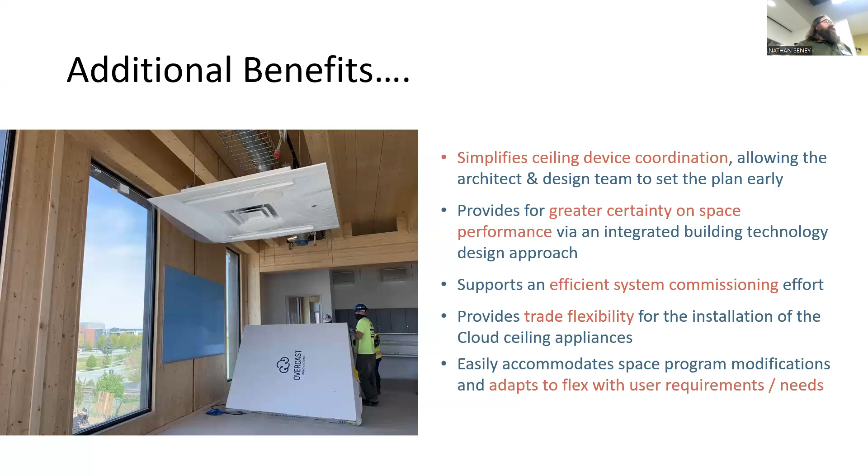So, and again, it offers just a lot of adaptability, and I think about that with building enclosures. Usually, like this building, this is an entry project, so I can't say anything bad about it. It's beautiful, but I can imagine our clouds in here, and usually you don't get a choice if there's a cold spot or something like that and you want to move things around. And with traditional systems, with already...

So I'm going to look at this slide. So our clouds are basically where people congregate in buildings. We're in probably 60% of the building overall. There's our cloud on the right, and then there's spline, which is a multi-raceway.

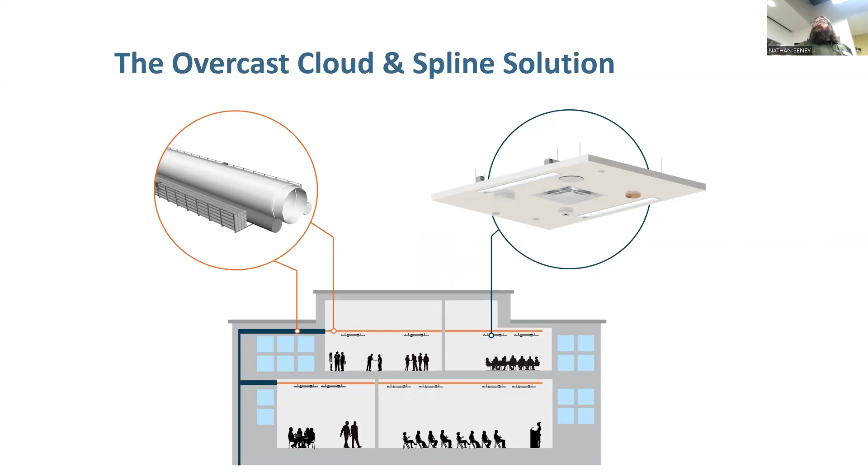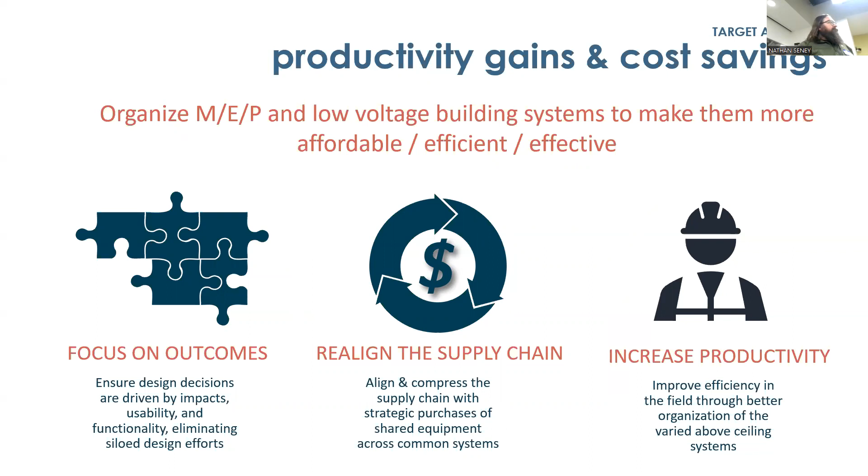Next one. Kind of what I talked about earlier, we push all the design decision making very forward in the design process. So we won't bring in the Siemens guys at the very end, let them figure out where everything's going to be. We get everything designed in through our tech panel that we'll show here in a second. Supply chain, I talked about that.

Perfect. There we go. So on the right hand side, this is the top side of our panels. And you can see the lighting, basically one point of contact for all of our systems. And then on the left hand side, you can see basically the three elements, all the tech lane in the middle there, the acoustic panels. If it's a CLT project, then we have the lighting on the outer edges.

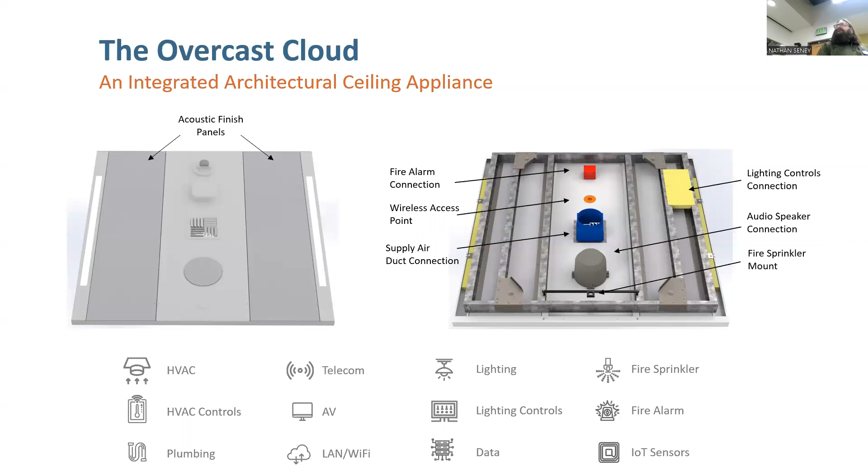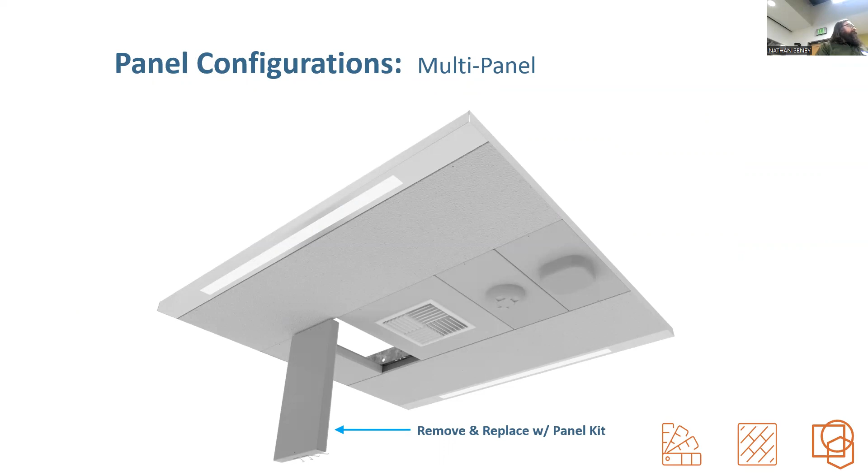I'll just skip this one. This just kind of shows how we get involved with owners and this system very quickly. Yeah, so there's the three different systems. If you've got an OEM relationship with someone and you want to incorporate that, it's going to take longer, it's going to be more expensive, but we can incorporate it. Otherwise, we don't want to end up with what happened with Terra, and we're just minimizing all the other systems.

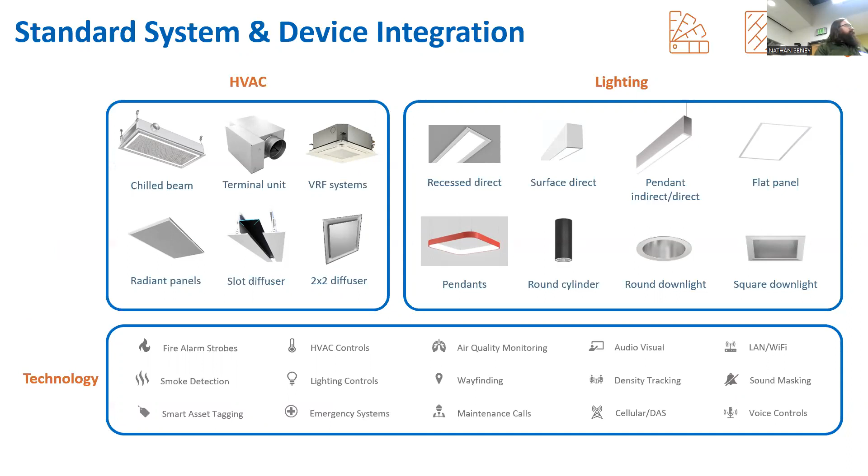Okay. Some of these are auto jumping. I'm not clicking ahead of it.

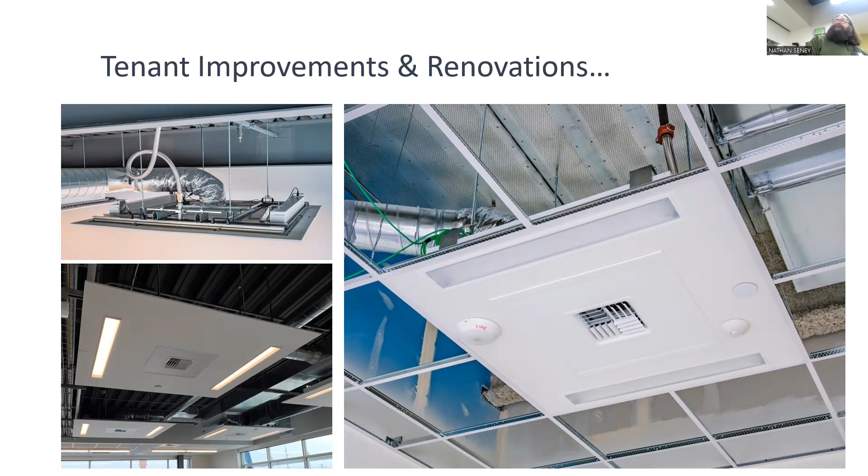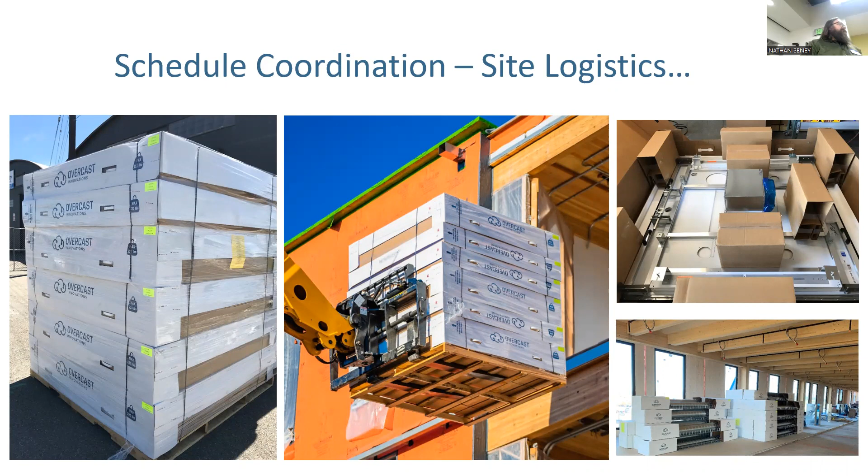And this is how, so we go into the outer building enclosure. We try to design in some space so that we can get in there. And then you can see on the upper right hand side, you can see the dunnage right there. It's using uniform contact. GCs, we train in about an hour, basically how to lift these up. Next slide can show that.

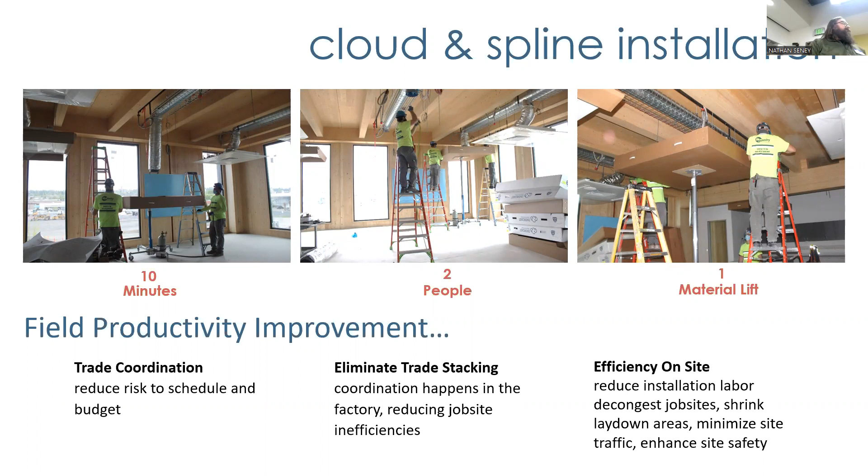And it's extremely efficient. So everything's the same. We're not changing the game or the skin here. It's just that last line, that last 5 or 10%. This gives GCs an opportunity to basically own a new technology that they've never played with before to finish that last one. I think this was outspoken also. And this is probably the last slide.

Maybe with this system, it's going to give some more flexibility in terms of some of the kind of gotchas with building enclosures where basically the sensors are just right here, which really doesn't monitor what's going on over here. So we're incorporating, this is basically a smart building platform. That's the message I would say. So it just offers more flexibility and smarter opportunities for us perhaps to work with the building enclosure side. I'll end there.

Thank you for that introduction. Cool, Brian, thank you so much. Yes, sir. Yeah, a set question and then a question.

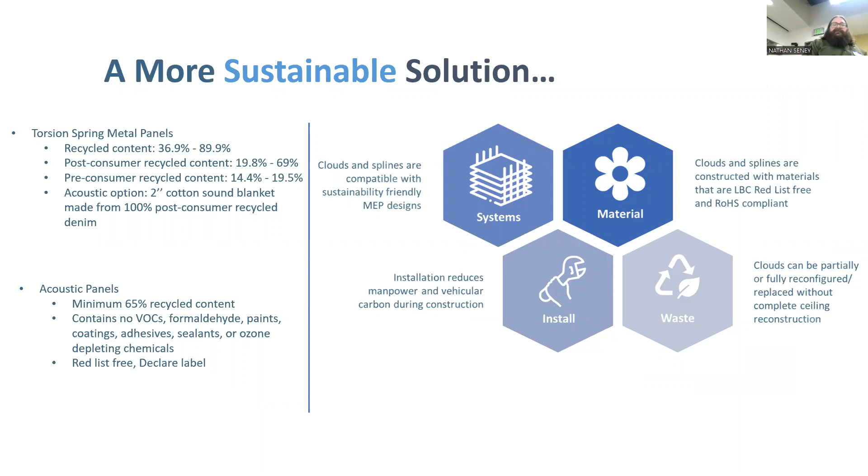So today we have Brad Carmichael from 4EA. He's principal at 4EA, originally from Vancouver. Oh man, I want to advance. He's been working on building enclosures in North America for 15 years. And he's bringing us his presentation on mass timber moisture monitoring in the Northwest.

Thank you very much. Hopefully this, I see it's run away. Oh, there we go. Okay. All right. Thanks for everybody being here. This is a topic that's sort of near and dear to my heart. It's part of the end of a big collaborative effort from a project. Wow, is it a timed thing? Because I speak very slowly.

Okay. So you'll see that this is part of a joint paper that Jeff from my office helped write, as well as Emily Dawson from Kaiser and Path. And it's a case study based off of a project, the Canyons down in Portland, with a lot of input from a lot of parties. And there's two more important contributors as well. If you've ever seen me talk, I always include a picture of my kids.

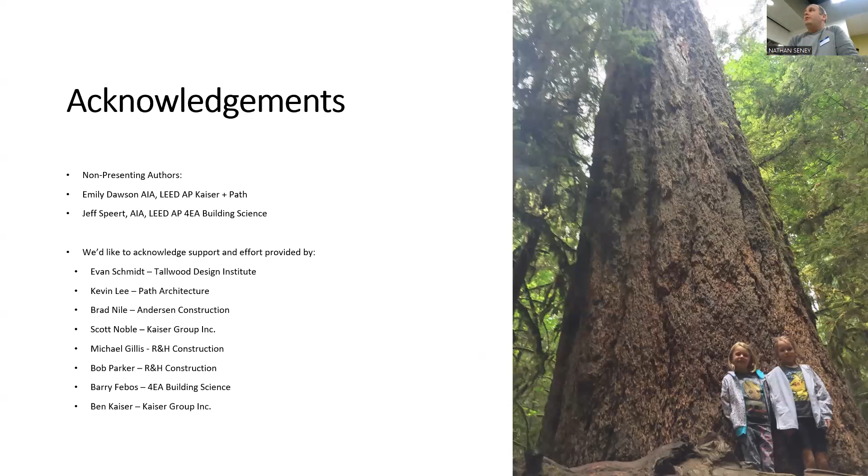And then this is some old growth Douglas fir about an hour from where I grew up on Vancouver Island in Cathedral Grove. The emphasis is on the need for sustainable forestry management, but also the benefits that building and constructing with wood can bring to us.

So what I'm going to do is give a little bit of a background on mass timber and moisture management. It's an ongoing topic. I'm sure that everyone might be familiar with it. I'm going to look at some of the prior studies by others. Give a brief overview of the Canyons project and how we collected our field data. Then get into the wonky elements of hygrothermal modeling and the fun that comes with that. Some discussion of results and some conclusions.

All right, how we doing? I think that should do it. If we can just resume.

Hopefully that's it. All right. All right, let's see. Okay.

So the big question is why mass timber? To ask it again, why mass timber? Well, basically, we all see the stats that buildings contribute to about 40% of greenhouse gas emissions. Of those 40%, 10% is attributable to the construction of buildings, and of the 10%, roughly 60% is structure, and most of that is concrete and steel.

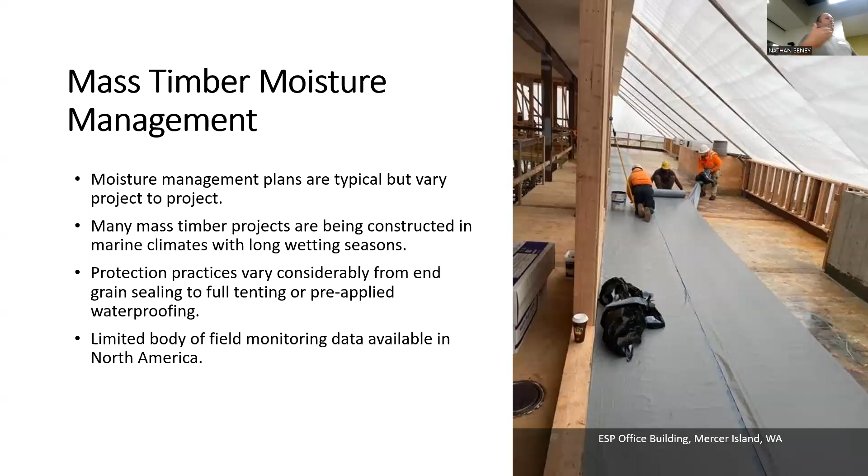There's not really a good established set of best practices. There are guides out there. There's also a limited body of field monitoring data out there to inform and give us evidence-based best practices. And so that's kind of what we were looking at here. So there is some field data collection in North America on CLT. So there's field data from a summer test wall out in Waterloo. Christy McClung did a number of experiments where they set up test walls in Ontario, set up data loggers and monitored the performance of the mass timber.

Then one of the first ones in the Northwest was the UBC Tallwood project, and they put data loggers to monitor the CLT there. They also noticed that moisture content spikes and rapid drying of CLT were occurring after rain events. And then there was an attempt for one of these buildings in Portland to monitor the CLT installation using data loggers that were sort of routed out and placed into the CLT. And this was at the Carbon 12 project in Portland.

And they monitored the CLT installation, but one of the issues that they had was by placing permanent data loggers on the CLT panels and putting them into service, water gets into the holes. It gets into the little spots where the probes are mounted, and it kind of starts to poison the data a little bit. So they ended up getting some pretty bad data results, and they suggested that maybe there's a different way to measure and monitor the moisture on CLT as it's going in. So there's also been some work on the other side of the hygrothermal properties of CLT.

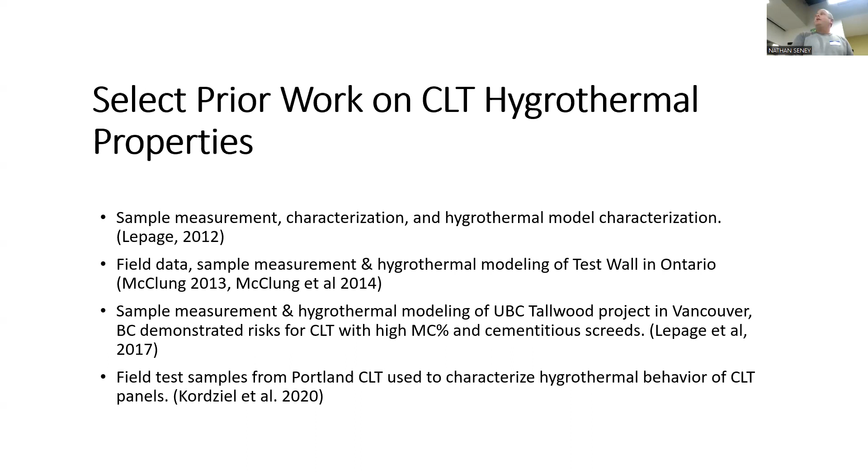Robert Lepage at RDH has done a ton of work doing sample measurement, characterization, and model characterization of CLT, as well as the Christy McClung work out in Waterloo. There's been some sample measurements of the UBC Tallwood projects, but then also this CLT project at Carbon 12 took some field samples of the CLT that they were going to be monitoring, and they built a hygrothermal characterization of the CLT. So basically the inputs that you would use to build a WUFI model using the CLT from this Carbon 12 project. That was just recent, in 2020.

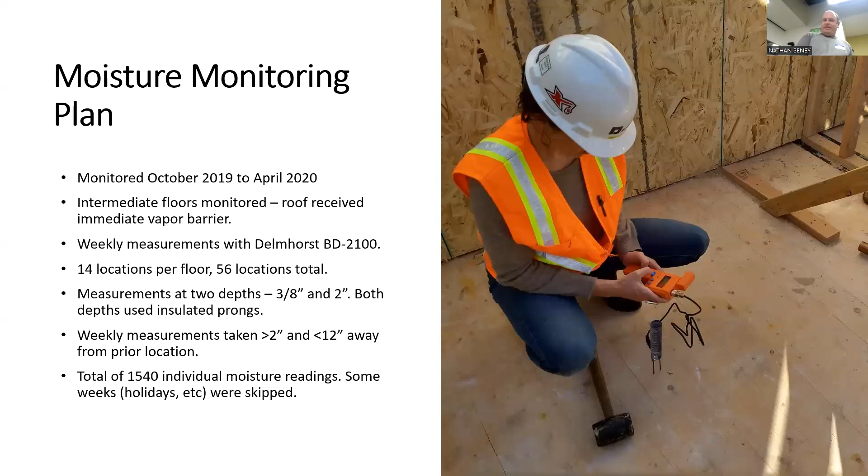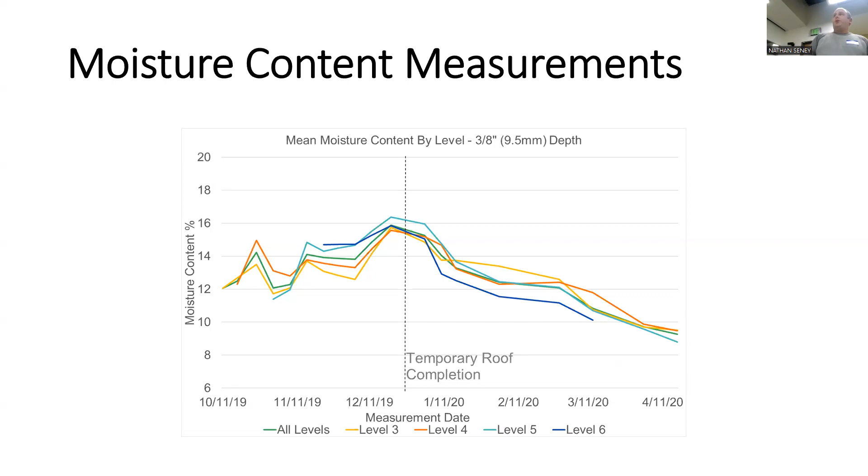So one of the things we found is you look at the start of each one of these lines. With the exception of level 6, which is the dark blue line, all of the other panels started at around, on average, 12% moisture content. So that means that generally through transportation, panels stayed pretty dry. 33 out of our 34 initial readings on the first 4 floors were all below 15% moisture content. One reading was at 21%, and on average, we were around 12% to start.

6th floor, I don't know what happened there. Maybe it's the last floor to go up, so it might have been neglected. The wood might have been stored in some odd way. It had 4 of 14 readings above 15%, but still an average initial moisture content of 14.7%, not too scary. But as you can see, the moisture content does go up from there. Is that the roof, or is that the 6th floor? Not the roof, because the roof got roofed in right away, we didn't even have time to do moisture content readings. So the 6th floor was just the last floor right before the roof.

Yeah. It's almost like maybe you guys should have just waited a few more weeks and let us get some data before closing in the roof. But yeah, come on, guys.

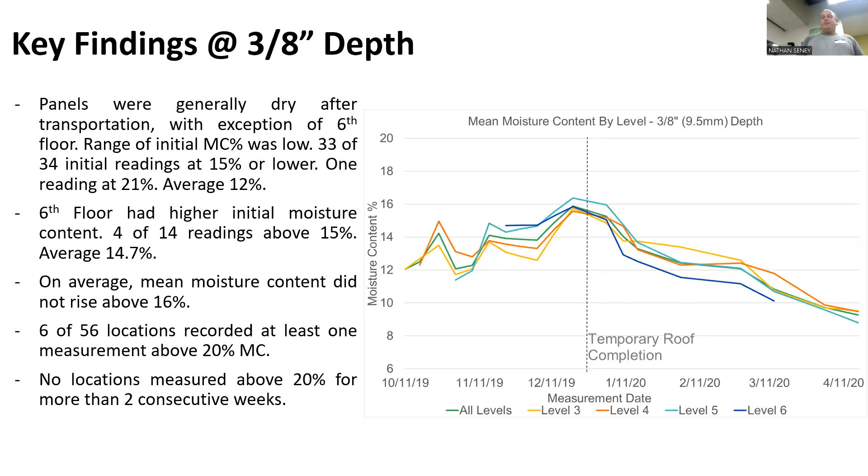You mentioned that you were taking these measurements. If readings were high, were they taking actions to address it, or just collecting the data? Good question. Jeff? I think it was mostly data collection, but there was an expectation that if the moisture content was higher, we would all know that we might have an issue. If it's the 3rd week and we can't get this wood dry, we would have had to take different steps, introduce early drying, improve the drying of the building, and start protecting areas. But the idea was, since the wood's exposed, as long as we were keeping an eye on it within a reasonable range, we all felt okay going along. So that was the intent there.

Okay. I actually learned this sort of recently. Moisture content readings got as high as 27.8, but the error is so high that I shouldn't even say it. So with a moisture meter, once you get it that high, it is totally inaccurate and it's just wet. But that was the highest measured moisture content reading that we got throughout. It does show, though, that some parts, if you let it go, can get wet, but the error in a moisture reader is just so large at that point.

But all locations at all floors, by the end of the dry-in period, were below 14%, within plus or minus 1%. Everything sort of hit that target by the time we needed our construction to keep going. We were typically within the 9 to 12% range. It did show that the dry-in was effective at getting the moisture out of the 3/8 inch depth.

Why did the level 6 stop? Yes, good question. So as far as I'm aware, that's when they put the floor on. So they'll load the building. They're going to pour the gypcrete floor on the top floor to sort of settle everything down. So gypcrete for level 6 went on March 11th, and so the readings just stopped for that floor. And by that time, everything else was down below.

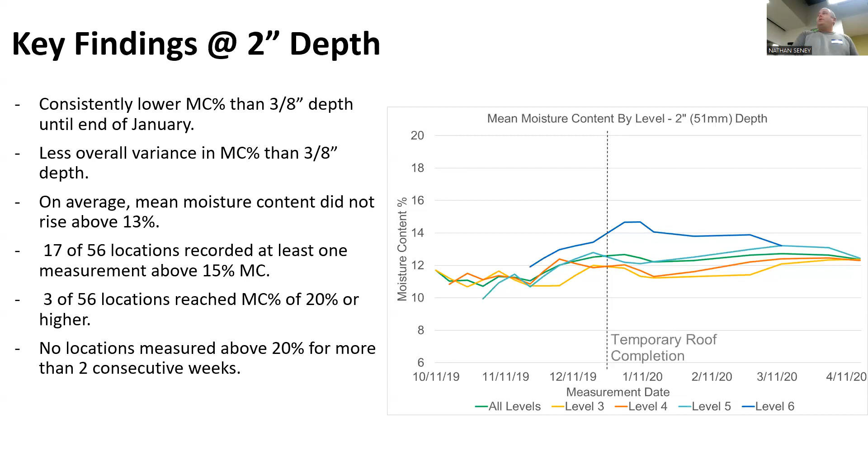Similar to the top ply, none of our locations had more than 20% for more than 2 consecutive weeks. So there's a slightly elevated moisture content after January. Everything was less than 15% consistently at the end of the dry-in period. Initial drop at the start of dry-in, gradual rise and plateau.

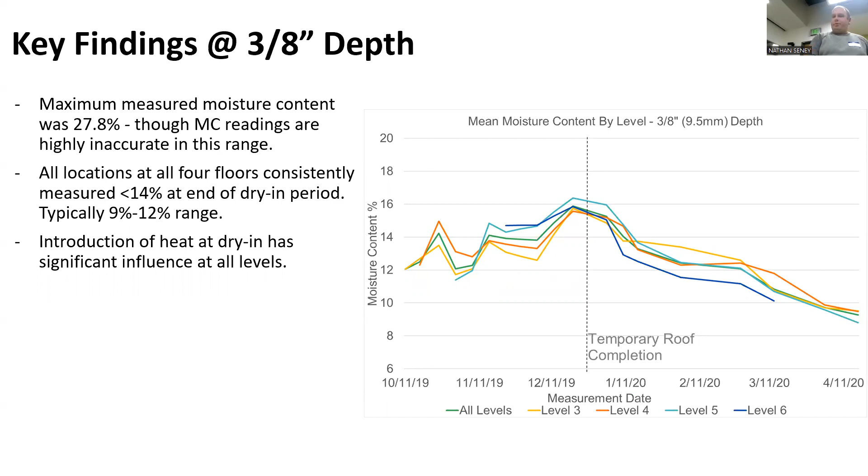And then the other weird thing is you almost have to look at them next to each other, but there's about a 2-week shift between the peaks and the valleys of where our moisture content went. So you can see that highest peak, the biggest amplitude of our wave, is on the left-hand side of the start of December. But the big peaks started to move and shift a little bit to the right-hand side towards the start of January before they have that drop off with the drying.

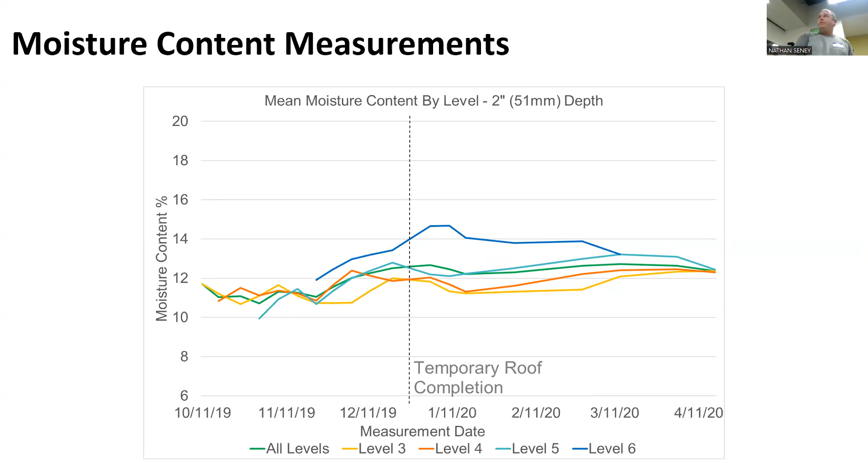And it was somewhat consistent, and it's hard to show in just the overall averages, but there was about a 2-week phase shift: when you have rain events, the 3/8 inch readings started to go up, and about 2 weeks later is when the middle of the panel started to go up. And that's just the slow process of wood redistributing moisture within itself. This is a question in the Q&A.

Sure. Oh, right on. Oh, I've got that somewhere.

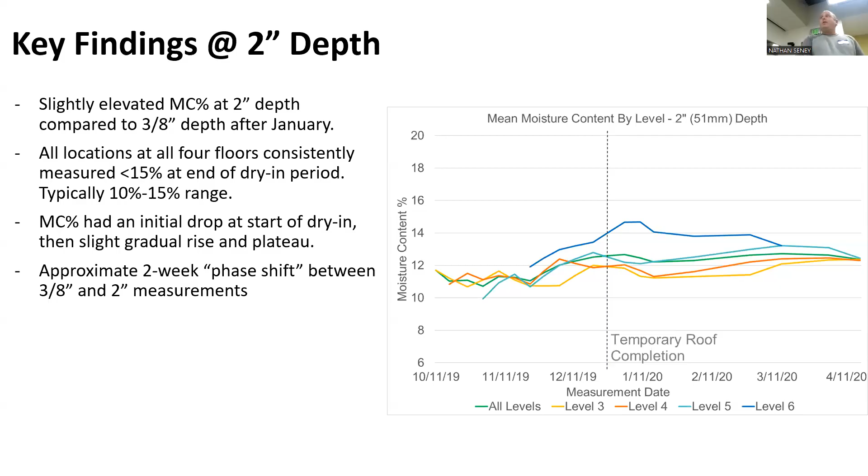Yeah, the question is, how many days of rain occurred during construction? There were a lot of days of rain. So there was a rain gauge, and we do have a weather file. Rain definitely occurred. I don't have the number available, but I can certainly follow up with that separately. I just have to dig into the weather file. But it definitely saw rain, and you'll even see I've got some photos. The panels got wet. It wasn't by any means a really dry winter. It wasn't the worst, but it was.

Oh, I think it reformatted my thing. Okay, that's all right. I think there we go. I think I had it on a wider slide.

So then what we did is we had all this data, and this building is right next to one from a paper where a group had been taking samples of the CLT and establishing their hygrothermal characteristics. And we had all of the data to match with that, because we were using the same supplier, same location, right next door, and similar project team.

We also, and I'll talk about it a little bit more later, had to make some adjustments to the models based off of research that was done on the UBC tall wood, which was starting to find, hey, the wood seems to dry out a little faster in real life than in the models. And that's what we're going to talk about a little bit. So here's the model setup from our characteristics, just to give a brief idea of how the inputs work.

So just as a bit of a background, WUFI is a transient hygrothermal model. It's one-dimensional. So you'll set up an assembly in a one-dimensional line through the assembly, assign material properties to it, assign exposure to it, and assign time basically to it, like weather exposure to it. And what it'll do is it'll give you the simulated moisture contents and relative humidities and temperature fluctuations through the assembly over the course of a period of time.

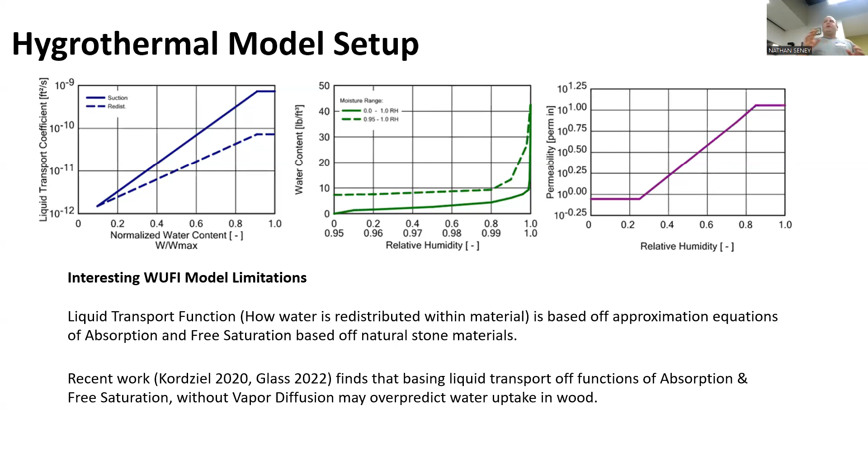We'll talk a little bit about that in a bit, but what's basically happening is these hygrothermal models, even when calibrated properly, even when using lab measurements of the same sort of things, the simulations are showing water getting absorbed faster and drying out more slowly than perhaps real world measurements would show. So those are the functions on the top line for the interior ply.

So how your liquid transport coefficient changes with your water content, but also how the RH, we'll talk about that, goes up with respect to the water content. And then how the permeability changes with relative humidity. One of the cool things about wood, it's a smart vapor retarder in a lot of ways, right? So when it's humid, it becomes vapor open. When it's not humid, it becomes a lot more vapor closed.

The panel itself, you can kind of see there, it's like the most boring WUFI model in the world. So you'll see we built a 5-ply panel. The darker brown is the outer plies of CLT. The lighter brown are the inner plies of CLT. We sliced the surfaces to give a 1/4 inch wide stripe at the 3/8 inch depth where we put one monitor. And then in the inner ply, we did another 1/4 inch slice at the 2 inch depth so that we were able to basically isolate.

If you are ever doing hygrothermal modeling, these slices are really important because if you're trying to find moisture content at a specific location, you need to slice the material. Otherwise, it'll give you just average values averaged out over the whole depth of whatever material you're using. And it's not that useful because you might have high moisture content towards the very edge of a panel, even though it's showing okay on the average. So you can sort of see those thin slices represent us trying to isolate where the measurements took place. And obviously it's shown vertically, but in the model, it's modeled as facing skyward.

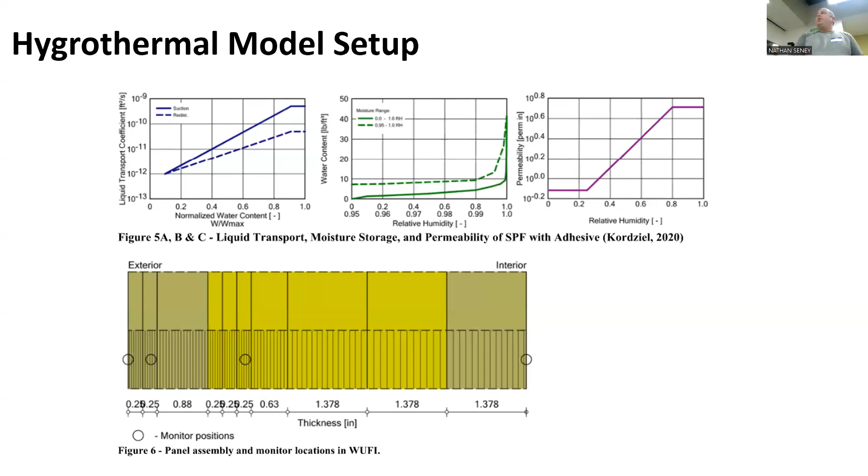The biggest thing with WUFI when modeling something like this is your rain load assumptions. And we run into this not just with sky facing CLT that's covered by the floor above, but also like how much water is actually going to get on a wall. There's baseline assumptions that if you don't know your project you can use, but once you start introducing things on a wall like canopies and roof overhangs and any areas that'll somewhat shelter, all of a sudden the fraction of rain that sticks to your wall starts to go down. And depending on the material you're using, right? So with a metal panel, less water's going to stick compared to a stucco wall.

One of the things we found is that when you're doing a sky facing assembly, when you do a roof, you turn the adhering fraction of rain to 100%, all of the rain lands on the panel, right? If it's totally sheltered, like that job where we had the tent over top and you want to monitor just the ambient moisture that's going to be going through there, you put down 0 rain, and then it's just ambient humidity that's going to impact your model. But what about a platform framed building where the floor up above is partially covered and you've got open windows and different levels of rain that are going to be hitting the panels?

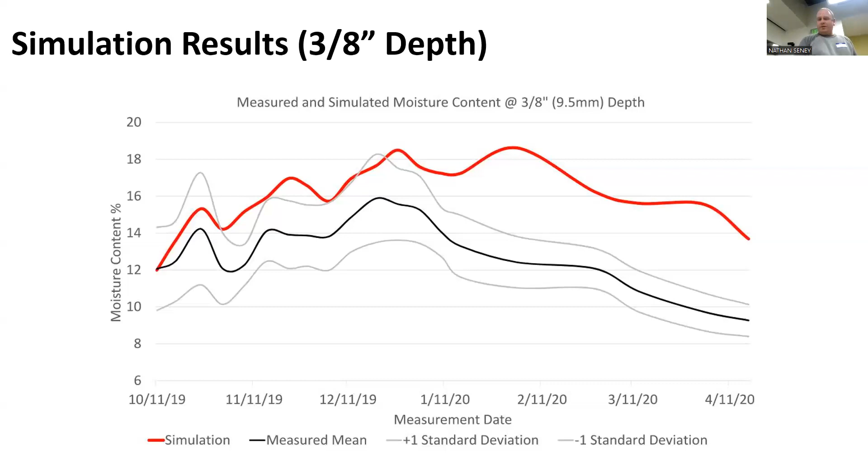Why is it not? Doesn't seem to be. I might have clicked out, perhaps. Here we go. There we go. Okay.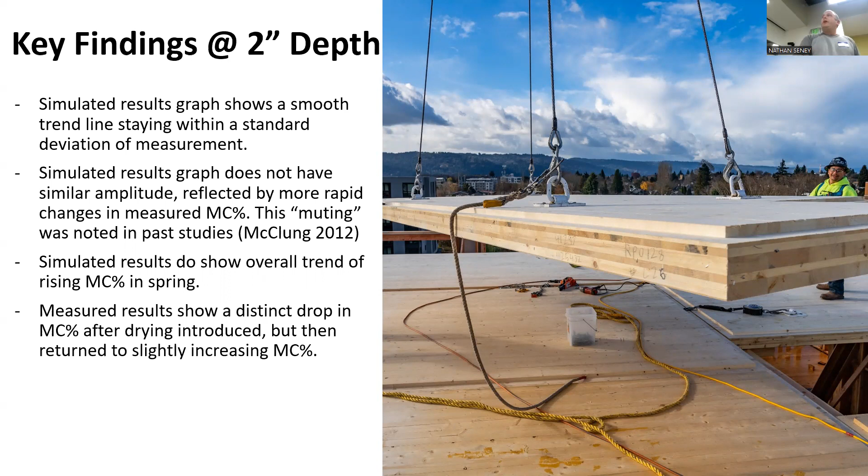The muting was actually shown in past studies. It seems here that the simulation kind of mutes the level of liquid transport within the wood panel over time compared to how you would actually measure it. So there are similar trends in research, and it shows that distinct drop in moisture content after drying compared to the models. You can see the difference between the black and the red once heating is introduced at the start of January.

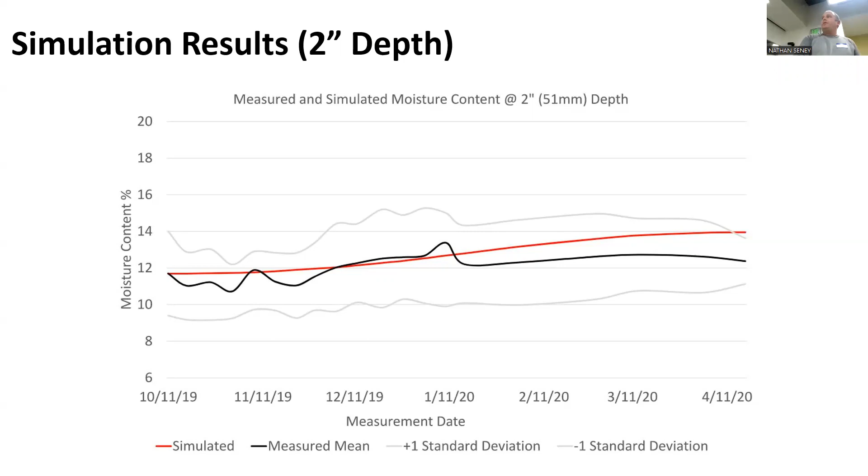So what's going on here? What is really cool? It's up to about 99% humidity. And even after that, most of the water in wood is actually bound in the cell walls. It's not really liquid water. It's called bound water. And that's why wood shrinks and swells as it gets wet and it dries. It's not actual liquid water that's sitting so much inside the wood.

But once you hit about 99.9% relative humidity, the over-hygroscopic range, that's when the moisture content starts to sort of shoot up. Okay. Natural stones are what WUFI is based off of. Those don't have these volumetric changes or bound water that wood has. So they're able to reach, like in a lab, saturation pretty easily and pretty quickly.

The other thing that we see with wood compared to the materials that WUFI is based off of is the wood has a cell structure. It's kind of like a closed cell structure in a lot of ways, and that traps air, and air resists the intake of water.

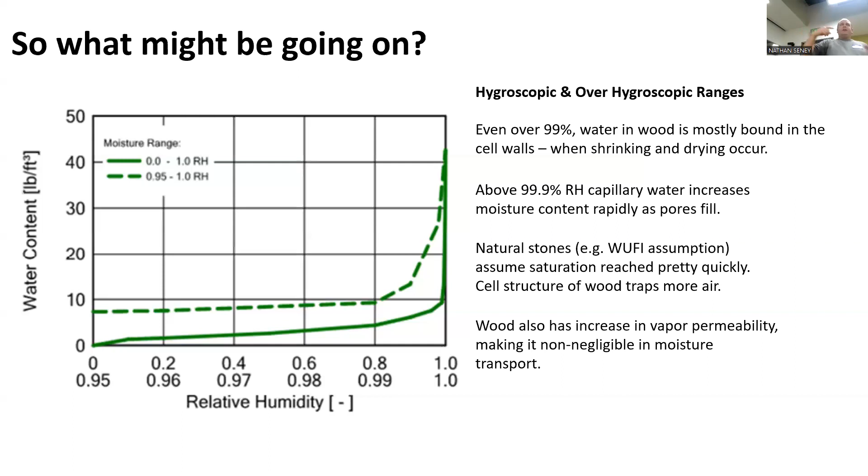So what we're seeing, or at least what some of the research is showing, is that the numbers you see in a lab from the saturation tests are actually a lot to do with the vapor permeability of wood changing over time and not being accounted for, because the models are based off of stones and masonry products that don't change in permeability as they get wet, and so they just neglect the input of vapor permeability. And so the amount of water that a model is assuming is double counting the amount of water due to the permeability of the material.

So your wood is anisotropic, straw is bundled together. The uptake in the side of a panel is quite low. It undergoes volumetric changes, and the permeability changes with increasing moisture content. Some of the published work out there is questioning whether or not vapor diffusion is getting double counted in a WUFI model. And the implications of that are that it's giving us over-conservative results if we're going to be modeling things like mass timber and how it reacts to moisture.

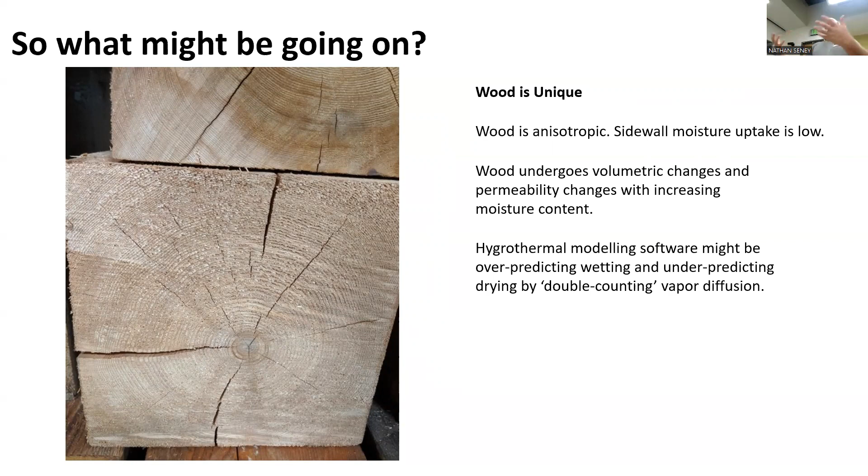Why is this important? Because we need to have really good, well-informed ways of simulating or anticipating the impacts of moisture on our wood if we're going to be building with mass timber in the Northwest, right? We can't stop construction schedules in October because we're afraid of wood getting wet. If we're going to start moving away from concrete and steel, we're going to have to live with the reality of mass timber going up in December in Seattle and how we're going to deal with that.

Over-conservative modeling may inhibit the use of mass timber. You may have contractors that get afraid to use a new material because we don't know how much rot we're going to get if it's out in the rain all winter. And it also informs resource allocation.

What we're seeing is the bang for your buck is not necessarily protecting the sidewalls of your panels, but preventing stains. Put your resources towards protecting your end grains, protecting your joints, protecting against stains, upgrading your hardware so that you don't have ungalvanized metal. Put the resources into those higher-end things, protect the wood, make sure if you've got cracking that you're keeping an eye on it, and always have a quality control program where it's very easy to have someone like a field engineer or a project architect that's there regularly taking moisture content readings and keeping an eye on it.

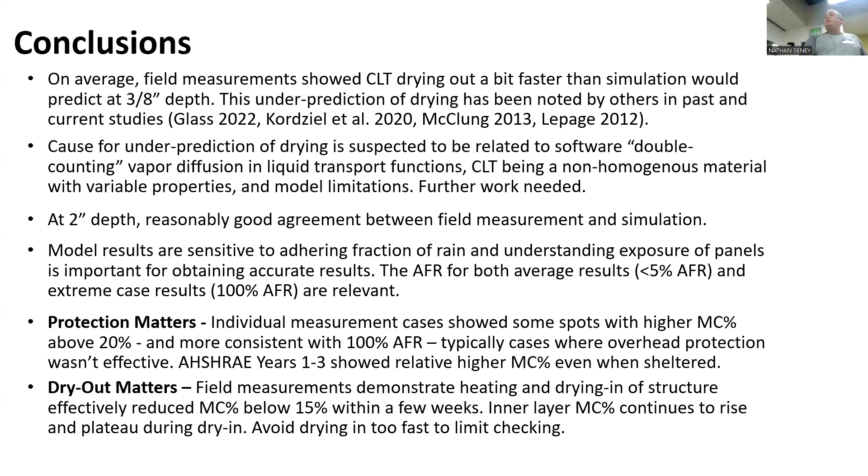And that is it. Any questions? Yes. It's been 2 or 3 years; have you had any callbacks or any issues with the panels since the building's been open? To my knowledge, no.

Yeah, and the other good thing is that building was the second building by the same developer, and so that developer who built Carbon 12, it went well. They didn't have any issues, so then they went and built the other one right next door to it. So the lack of issues was enough to give the developer confidence to do the same thing.

And we weren't on Carbon 12; we were on the Canyons, and there was a degree of confidence in the team of everything went fine on Carbon 12. Let's take care of the joints, have a plan, monitor moisture. And we were kind of, ooh, it's Portland and it's the fall. Do you see this coming up in Seattle or what?

Yeah. I think some of these projects, the Milgard Hall was Tacoma, and then the health sciences is over at UW's campus. I think, was it Founders Hall? So the University of Washington is building quite a bit with CLT. We're seeing some more CLT, the ESP offices, and it's certainly going to become more prevalent in our marketplace. Our code has just changed in Seattle to allow CLT up to 18 stories.

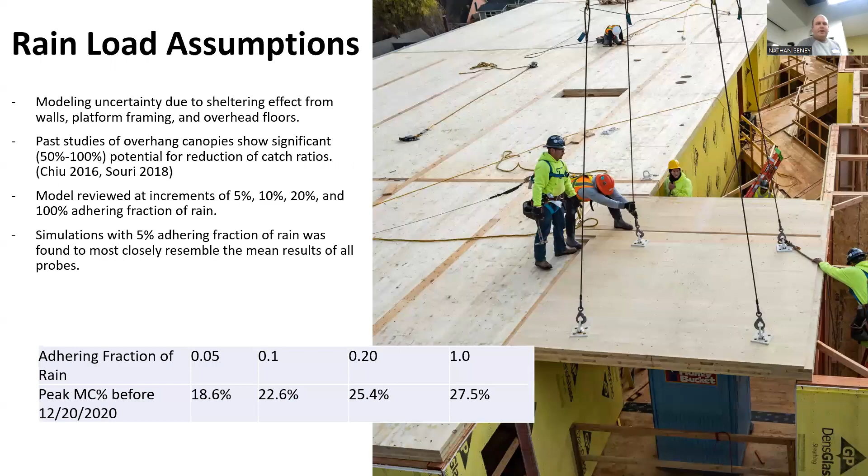What's the cost differential between concrete or steel structure versus CLT structures? Is there a rule of thumb? Yeah, that's a really good question. So I want to go back to, let's see here. The health sciences is a good example. Because there's projects where, and if I remember correctly, with Founders Hall at UW, my understanding is that CLT wasn't the most cost effective, but it was close enough that the team went with it anyways.

I'd say that it should be something to be careful about, taking the costs in a silo. Because health sciences was the one where the team planned from the beginning to beat schedule. So sometimes the biggest cost in your construction project's not the material, it's the schedule you're fighting against. And having the CLT panels, and this is actually why we didn't put a temp membrane on, what they ended up doing is just rolling a flatbed truck up to site, picking the panels in place and getting them in and keeping the building moving and getting it enclosed right away.

So they picked up on schedule by not having to wait for rebar, not having to wait for all of the concrete to cure before you can get flooring in. They pre-panelized, so we hung pre-panelized walls that were waterproofed in a plant. Those also came off the flatbed of a truck. So everything on this job on the enclosure was essentially pre-panelized. And you take that and you work that into the schedule, and it's difficult to quantify how much you save over the inevitable schedule delays you have of not getting a rebar inspection passed, you know what I mean.

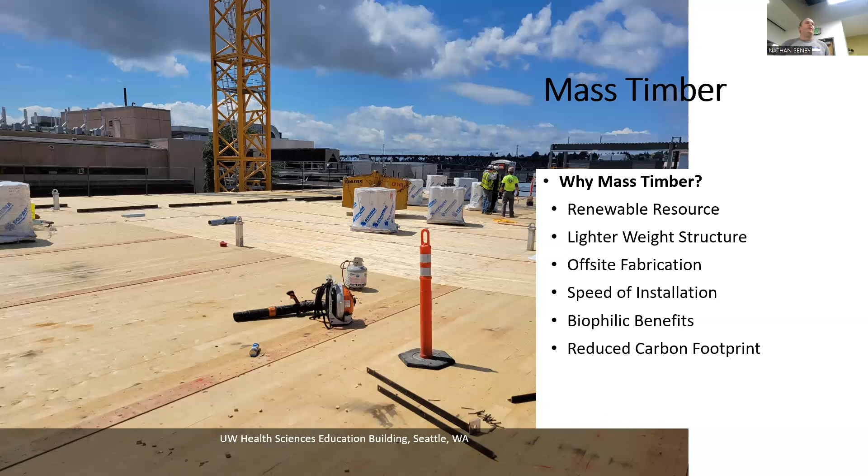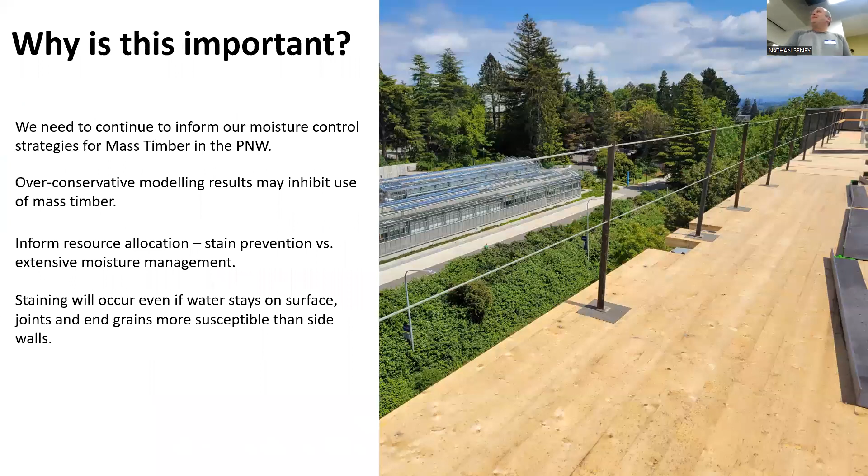So I may or may not have a building science themed Twitter account. So it says, look at all these great modeled results, and measured results are really where the truth and all of the dark secrets are, whether it's energy models, WUFI models, or anything. It's easy to make model results look good. The reality is sometimes measured results are, we see it with air tightness, we see it with window testing, anything. By the time we measure and test, that's when we start to see the dark side of things. I feel like you do your work at Disney.